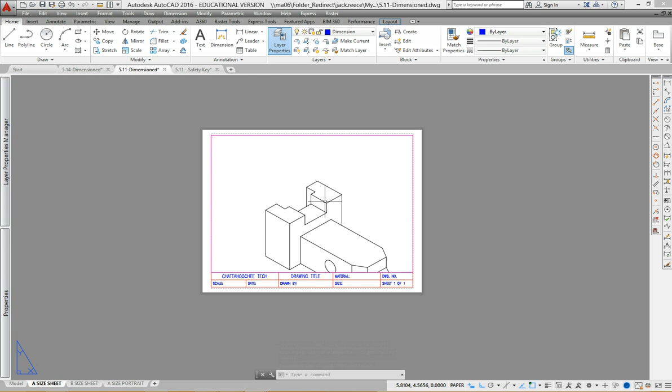Because we're doing this one at a half size, I've got it all drawn here in model space. I've got my center lines in, okay? So if I go to my layout tab, my A size sheet, if you haven't done this from the previous drawing, you need to.

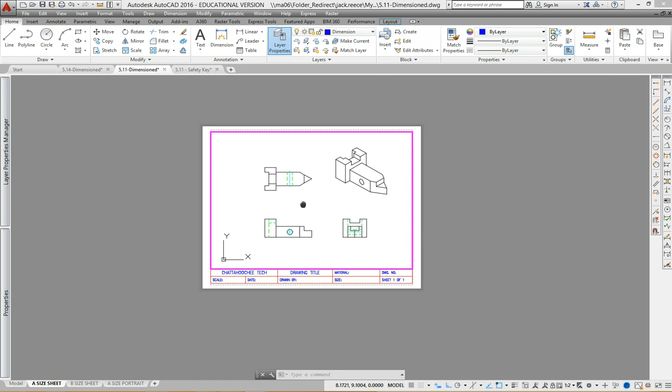Get that kind of centered up, and we're going to go with a 1:2 scale, and I just want to visually make sure it looks centered. Okay, so that looks like I kind of got equal space up and down, left and right. Maybe I can move it a little bit more over here like this. Okay, so that looks pretty good there.

Now I want to lock my viewport and go back to paper space. Okay, so now I'm going to put my dimensioning in here. But before I do that, let's check my line type scale, because remember, our dashes should be 1/8 inch long. So I'm just going to pop a line in here temporarily.

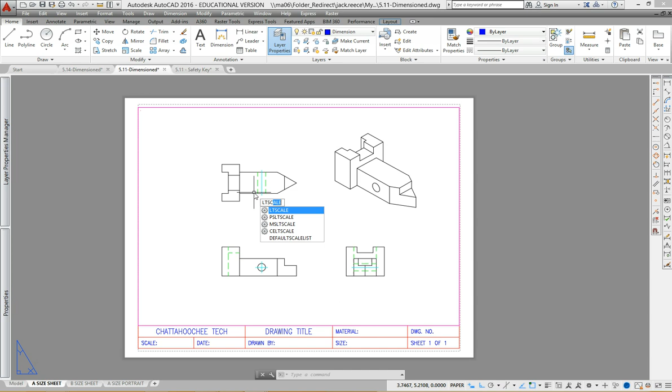That is 0.2, we'll say 0.2. Let's go to my calculator. And I need a line type scale of about 0.6. So let's go line type scale 0.625. Let's try that one.

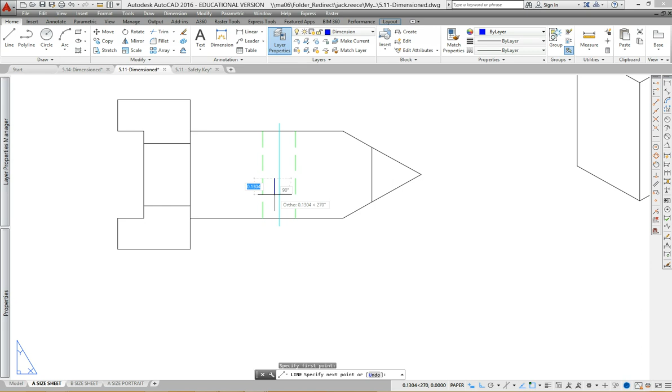I didn't get it small enough. Let's just try 0.5. Usually that works with half size drawings. Close enough, 0.124, 0.127. That's close enough.

All right, but my center lines, they are not showing up. Let's go back over here to here. They're showing good. Maybe that's my line types.

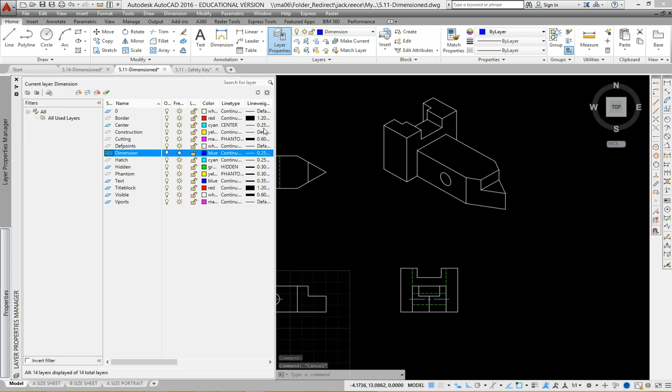Let me check that. Okay, so let's pop that and go to properties, layer. Oh, that looks good. I guess it's because we're at half size.

So let's go into model space here and choose those, and we'll do another 0.5 on those. That took care of everything except for here. Sometimes you just have to play with that line type scale to get it to work right.

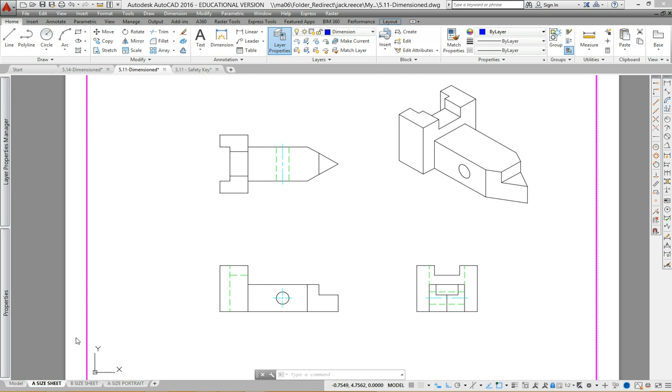Now let's pop back up over into paper space. Okay, so that's looking good. Those are kind of small, but I guess it'll work. Okay, so I've got it set up. Of course, you're going to fill in all of this information down here.

Now, on dimensioning this one, I'm going to give you a PDF that shows you what it should look like completed. One word of caution: in the textbook, when you look at the top view, it shows a 0.7 dimension, but it's crossing over a 0.50. It's of this information up here in this area.

In isometric, we kind of have to bend the rules a little bit, but in orthographic dimensioning, never cross a dimension line like that. Always put the dimension somewhere else. And so I'll give you a PDF showing you how this one should be fully dimensioned.